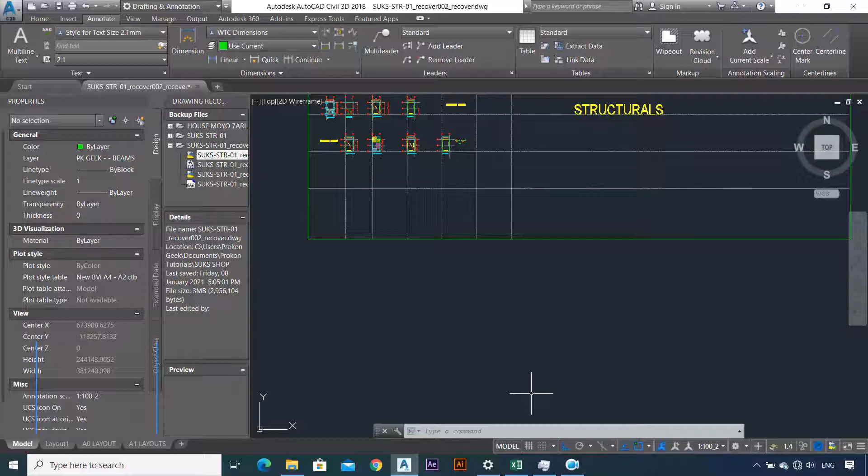Okay, what's up and welcome back to the channel. This is the Prokon Geek, and in today's video we're looking at Let's Design a Double Story Building Together Part 5, where we'll be looking at the takedowns for preliminary sizing of our bases. So without wasting too much time, let's get right into the video.

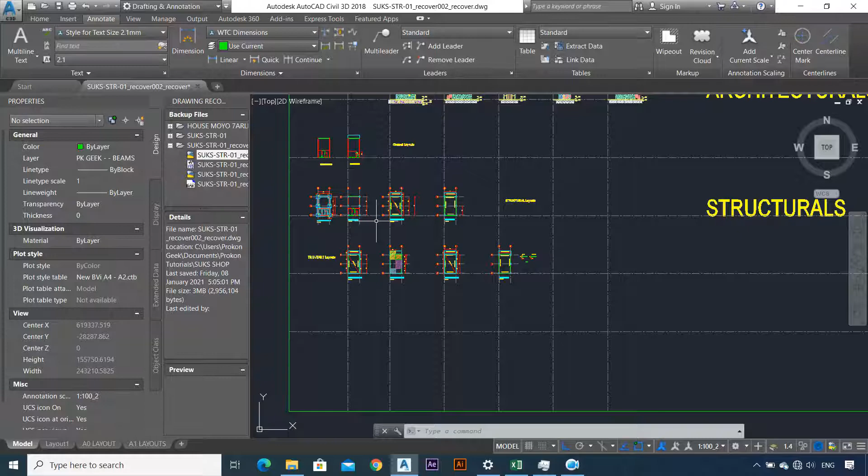So as I told you, we already have done part 1, part 2, part 3, part 4. And if you remember the first thing we did, I always like to repeat this: we took our architecturals, we cleaned the architecturals, we established our structural layouts, and later on we did the tributary layouts. We also managed to establish our grid lines and do the tributary layouts, which is great.

Now what we need to do is, as I told you, the design approach is you get your calculations, you preliminary size the foundation that you would want to use, or you just see the amount of load that will be going down to your foundation, so whether the pad footing you decided to use will be okay, or in case you may need to use raft footing, or you may want to use piles. All that is determined when you do the preliminary sizing.

Now normally when you're designing, the best thing to do is to go from the top going to the bottom, which is what we're going to do now, as opposed to the previous series where we did a bottom to top design, where we did calculations and started designing going up. Right now we're still using the same method of going from the top going down, looking at the loads going to the foundation. This is important for actually determining if the foundation we need to use, or the one we have chosen, is going to be of good use.

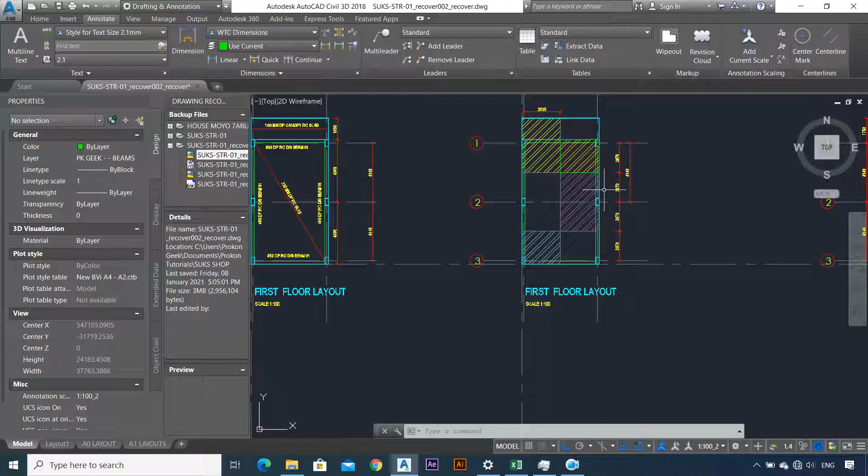Having said that, so there we are. We established our tributary layouts, and as I told you, the first floor is very similar to the ground floor and the roof for this building, but in essence we're just going to be using the loads coming from the roof, right, where you can see my mouse, and then the loads coming in from the first floor. But the loads coming in from the ground floor do not really have an impact on our foundations, that is the pad foundations, because we're doing a frame structure.

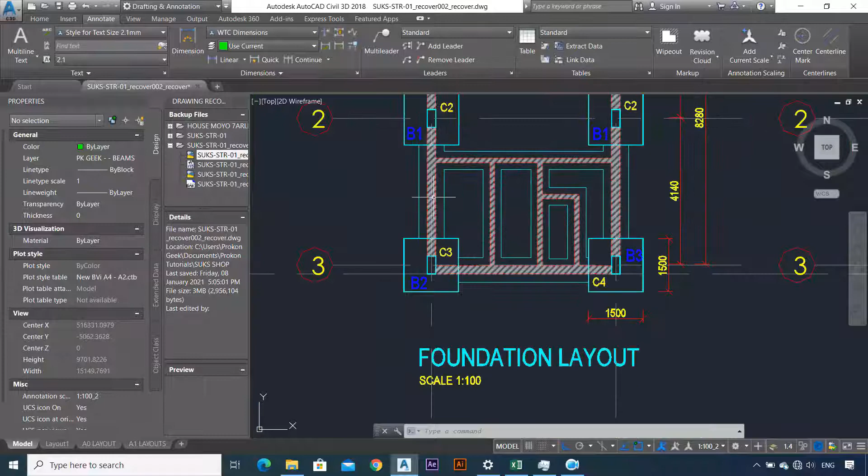As these, that is to say, if we go to the foundation layout, you can see there's going to be a strip footing, so the slab within the building for the ground floor will be bearing directly onto the ground, and the other loads will be transmitted via the walls straight into the strip footing. But what we are mostly concerned about are the loads coming in from our columns and going to our pad footings or pad designs, which is what we want to see today.

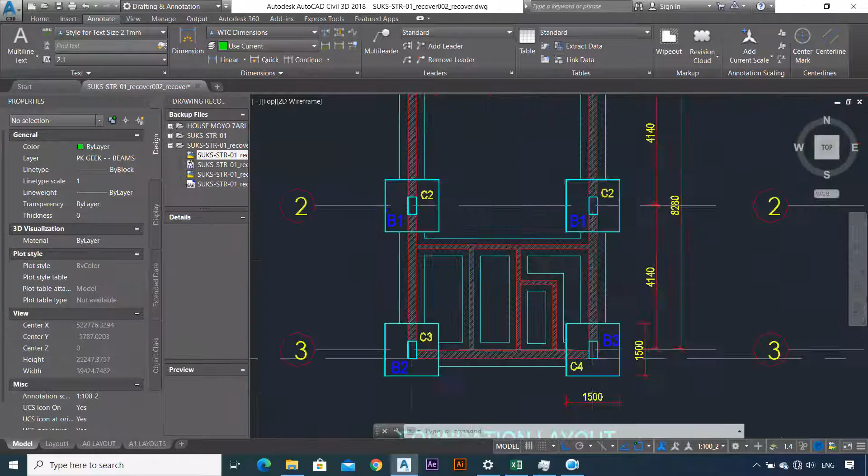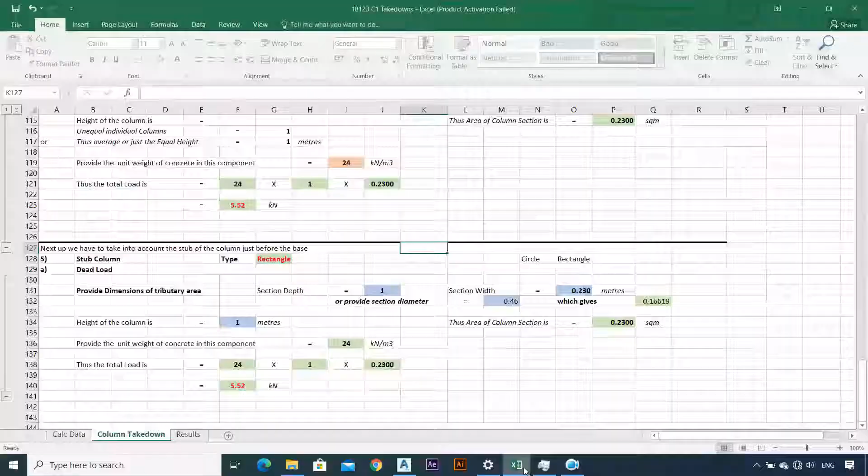So we need to find out if the pad footing will be okay, and also what size we may need for that pad footing. And to do that, we need to do the takedown. So the first thing that we're going to do is a takedown for column C1, which is this one. Then we're going to do for C2, and then we're going to do for C3. So what we're going to do is, as I told you, I already have this sheet.

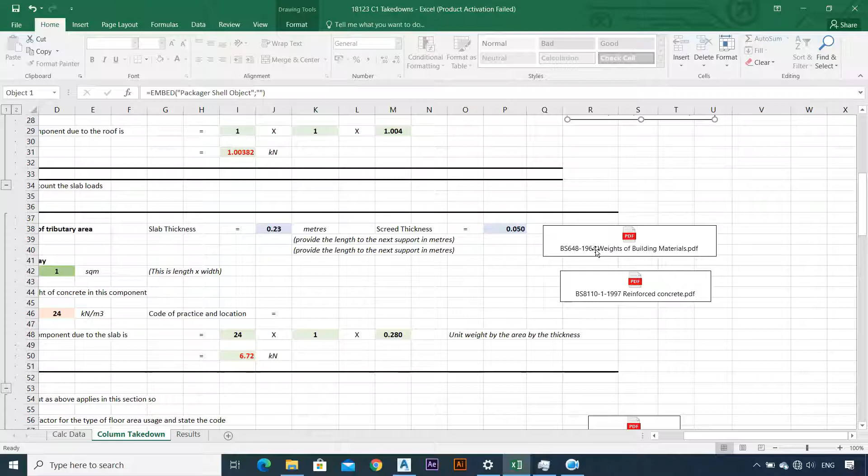What I'm going to do is distribute the Excel, since I created it. Also, for the roof, the minimum loads to be used are already embedded in the Excel, so you don't have to worry about it.

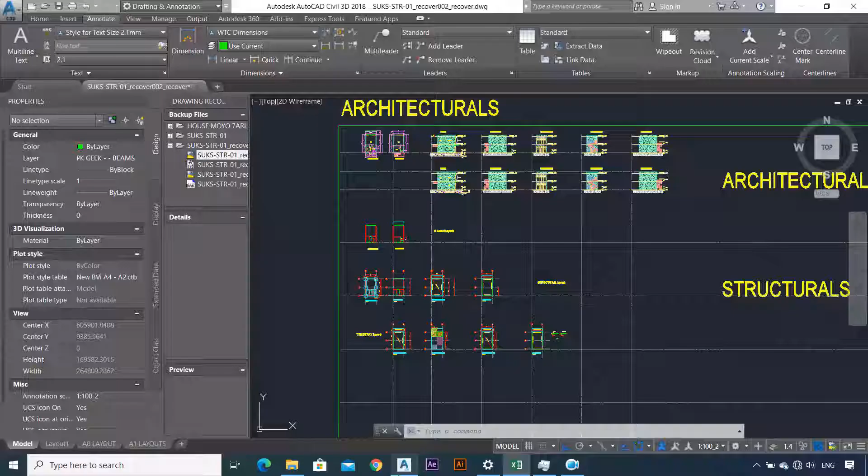Now to get started, we need to calculate the loads that are going down to C1 for this particular building. The first thing we start with is the roof. At the roof, first we have to take into account the roof loads. For the roof, you start with the dead load before going to the live load.

One thing you do is enter the dimensions of the tributary area from AutoCAD, or just enter the area directly. By default it's 1, and we need to change it to the area we have. The roof pitch by default is 5 degrees, because that's the minimum when you have IBR sheets, that is metal sheeting, which is what we're going to have in this case.

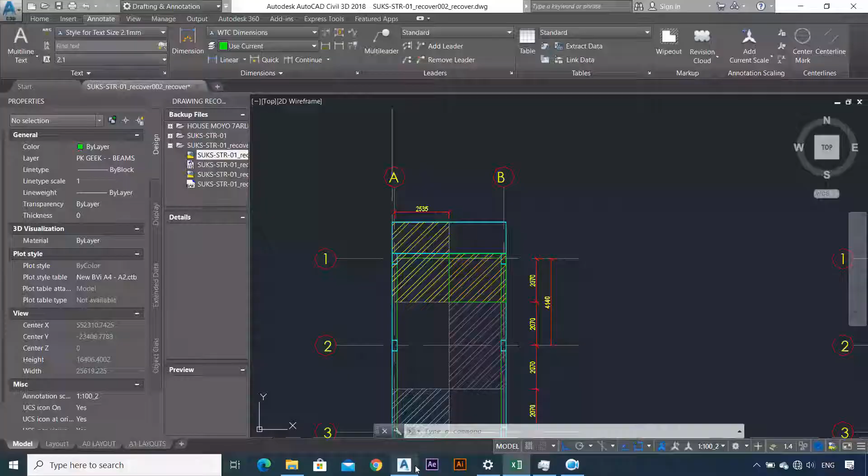Some of you may argue, aren't you supposed to measure the angle from the architect? What you can do is go there and snap to this point, but as you can see, the angle is 1 degree. However, the manufacturer of IB sheets or IBR sheets, where I'm from, which is Zim, requires a minimum of 5 degrees, so that's what we're going to use. In this case, you'd put whatever pitch is on your drawing, but here we're going to use 5.

It's going to automatically calculate the reduction factor for you, so that's one thing that's already covered. You don't have to worry about that.

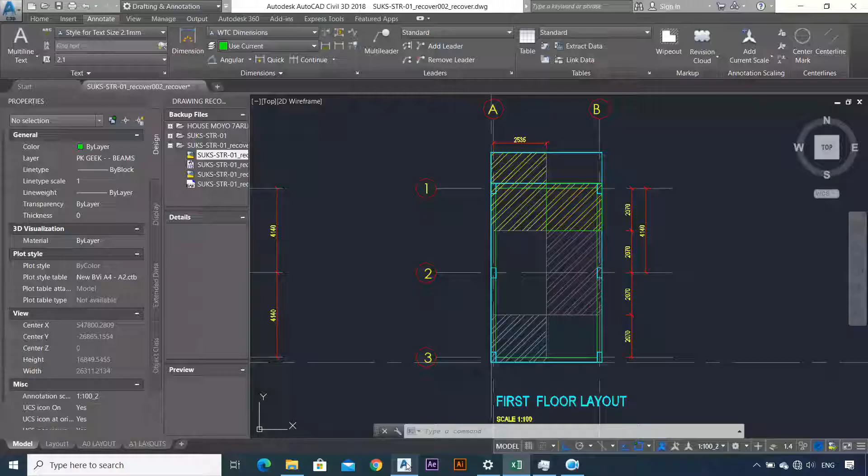The next thing you do after that is enter the area of the tributary. Go back to AutoCAD. One thing to notice is why I have this area and then also this other area - it's because this area includes the canopy at the front, which is the slab at the front. If you go to the architecturals, this is the part of the canopy. But when it comes to the roof, this is not included.

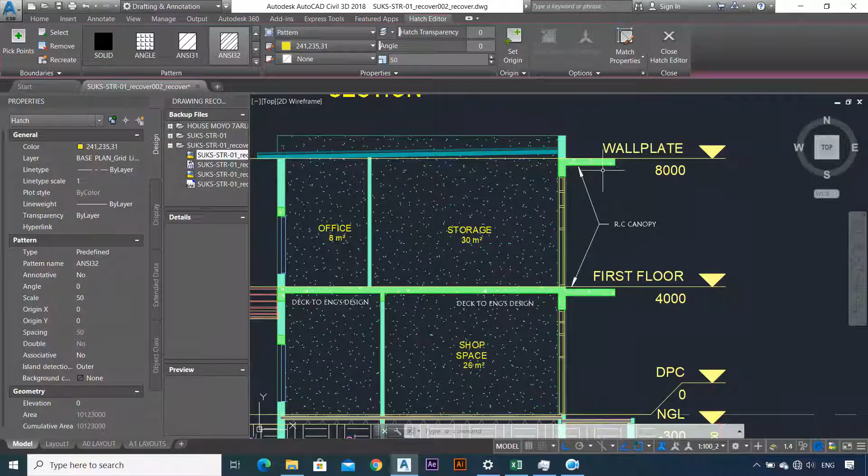This area is not going to be contributing anything because there's no roof at that point, but the roof actually starts from the inner wall. So for your case, you need to come back - that's the reason I decided to have two areas for this portion. This portion represents the area that is directly coming from the roof alone, not part of the canopy slab.

So if you go to that, you'll find the area is 6.148 with some zeros. What you do is divide that by 1,000,000, and when you divide it by 1,000,000, it means 6.15. So go back to this and key in 6.15.

Now that you've keyed in 6.15, what is the factor that you're going to use? Remember, this can be coming from the ASCE 2002, but you will find that this is adopted from the Residential Design Guide 2017, which is also based on ASCE, but from 2017. So you can disregard the original, and you could say ASCE 2017, or the Residential Design Guide 2017.

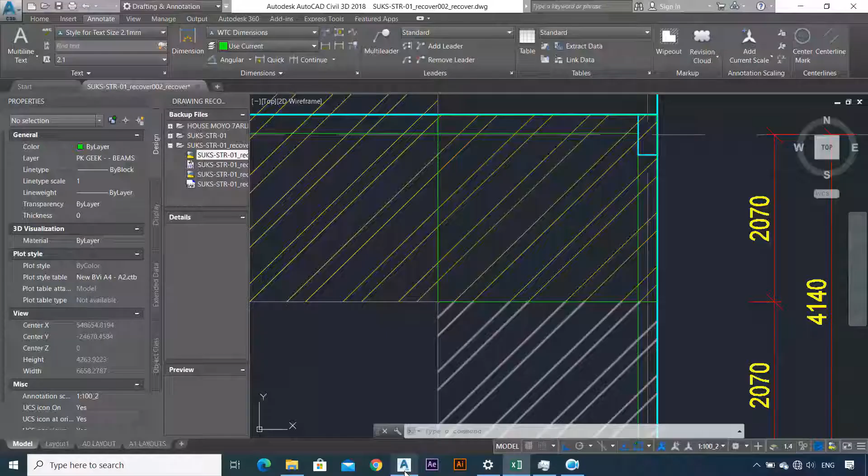Then what are we going to do? So the roof, from the architect, I consulted with them way before when they gave me this drawing, and this roof is supposed to be IBR sheets. We're saying metal roofing, this is galvanized, you could say galvanized steel, whatever it is.

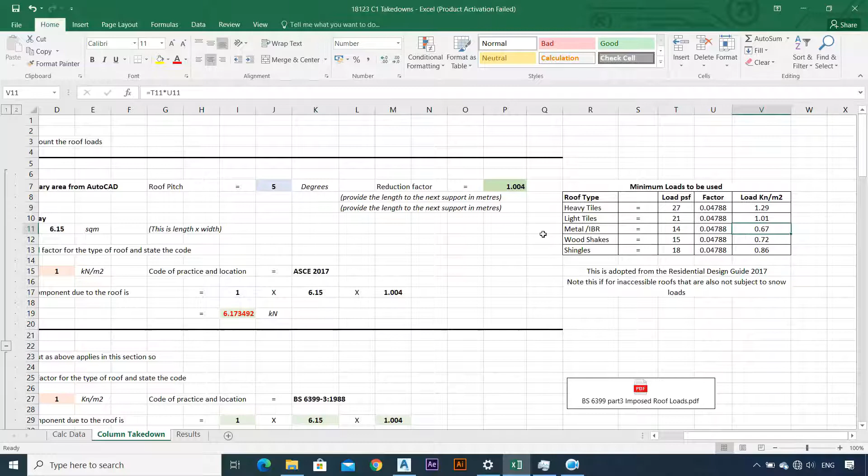So in this case, if it's metal or IBR, the load is 14 pounds per square foot, or 0.67 kilonewtons per square meter. This is the minimum, remember. So I could key in 0.67 right there, or I could key in 0.75 or 0.7, because the minimum is 0.67. It was supposed to justify the minimum. Normally you want to play around with the minimum because that's the average seen in the field, but in this case I decided to play with 1 to cater for any contingencies in the manufacturer, or deviance that could happen whenever they're producing these IBR sheets. Once that is done, we've keyed in 1.

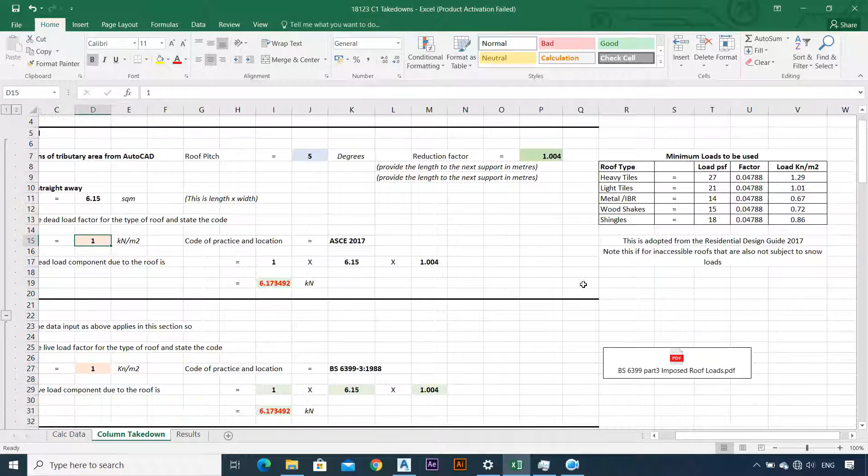The next thing you would want to do is calculate for the live load. So for the live load, you basically provide the live load factor for the type of roof and state the code. In our case, the factor is going to be 1.

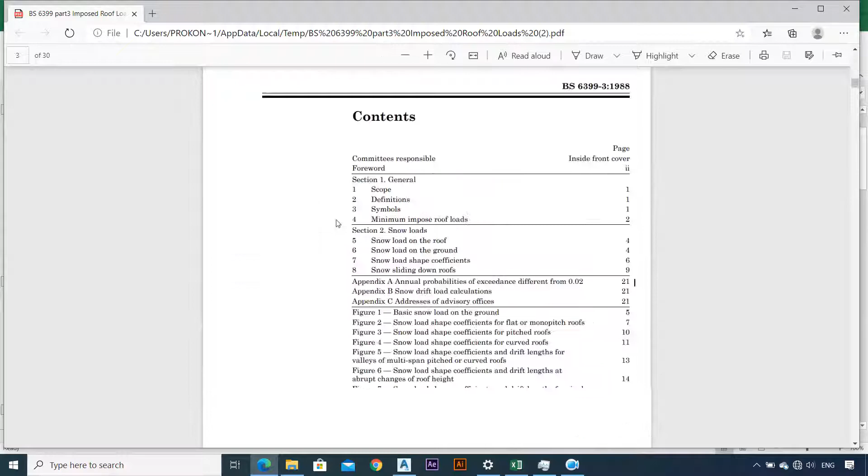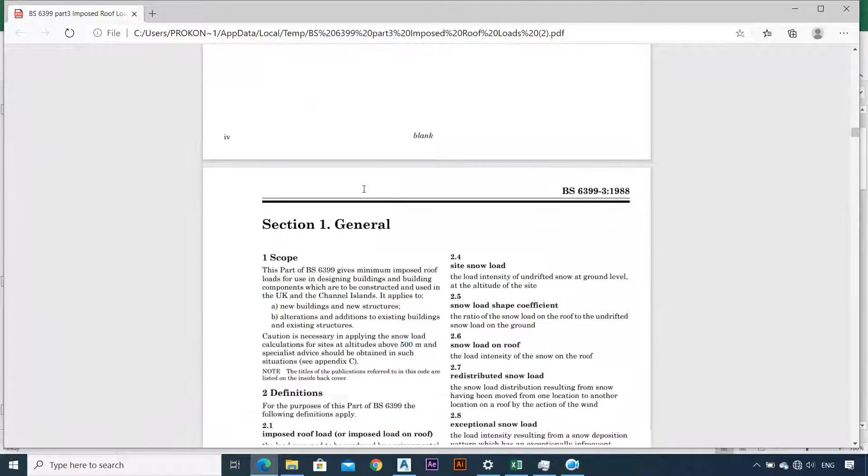You can always open up the code that you're going to use, and this particular one has the imposed roof loads for roof. If you go to section 1, clause 4, it has the minimum imposed roof loads. So let's just go down, this is section 1, and we want clause 4 where you have the minimum imposed roof loads, and in our case we have an inaccessible roof.

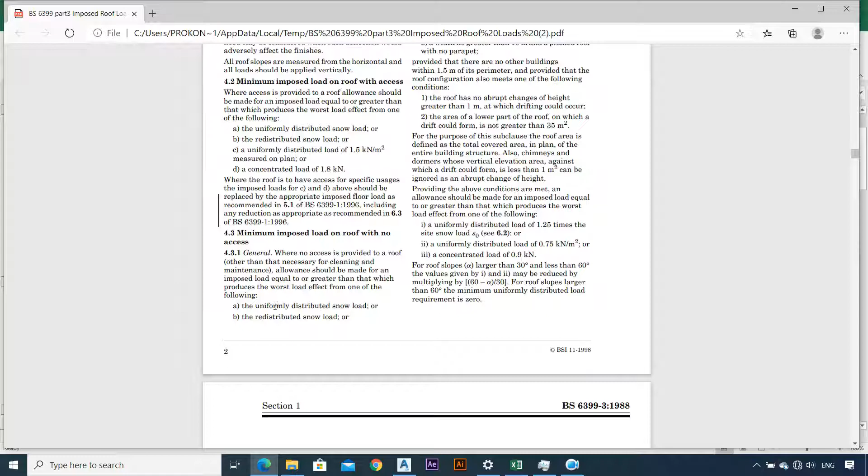So you have the minimum imposed load on a roof with no access, where no access means you only access it for cleaning and maintenance. So you either have uniformly distributed snow load that you have to calculate, or use the redistributed snow load, or use a uniformly distributed load of 0.6 kilonewtons per square meter measured on plan for roof slopes of 30 degrees or less.

Or a uniformly distributed load of 0.6 multiplied by 60 minus the angle, which is above 30, divided by 30, and that gives you the load. Or if the pitch is going to be greater than 60 degrees, you use zero load as stipulated. So as the pitch increases, the load on your roof on plan actually decreases. In essence, the higher the slope on the roof, the less the load.

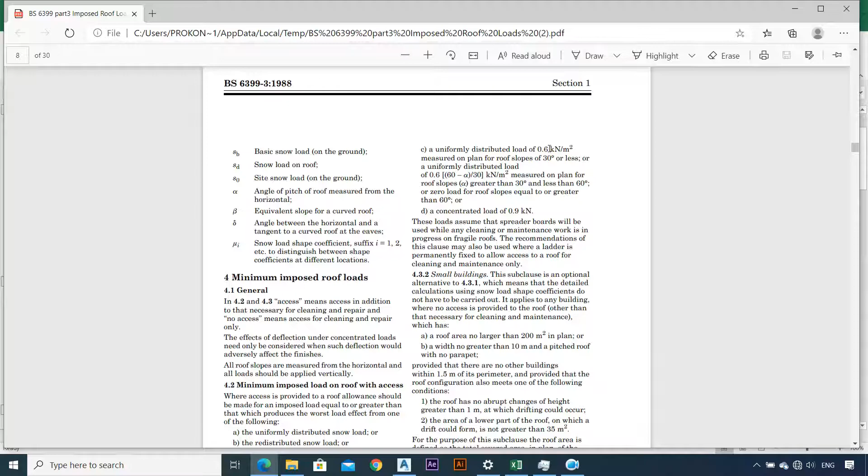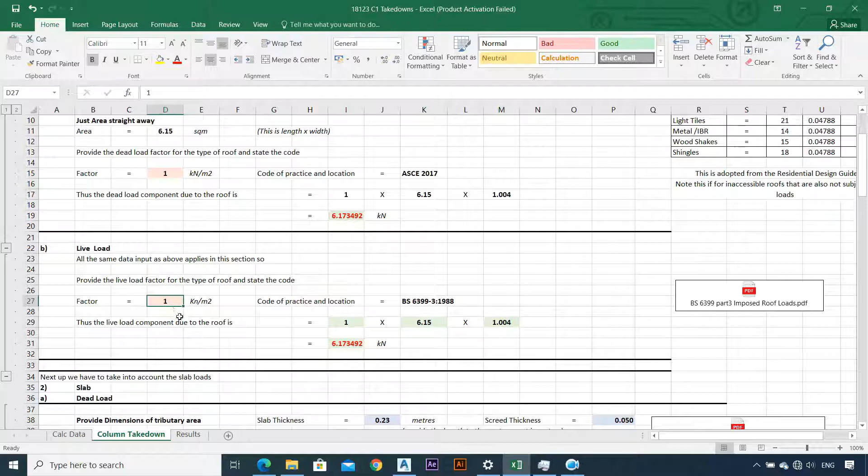But in our case, you're in Zimbabwe, you're in Africa, you're not expecting any snow, so you don't have a need to calculate the snow loads - you just enter 0.6. But in our case, I'm just going to put in 1.

Now once we're done with the roof, the next thing we need to do is go to the slab. So the slab obviously has the dead load and the live load. For the dead load, we have the slab thickness and the screed thickness. Normally people use the load for the floorings and everything, but I just want to approximate everything to screed, and in this case the screed usually uses the standard of 50 millimeters.

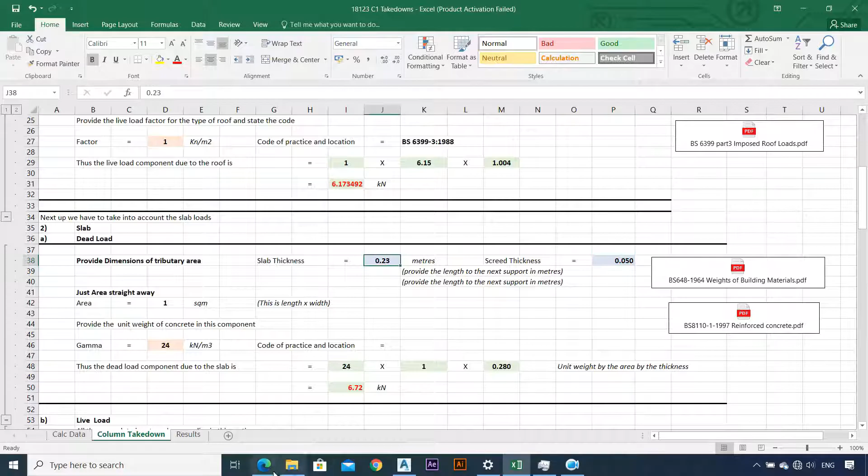Normally it's 30, 40 or 50, but I go 50. And for the slab thickness, remember we sized our slab and we agreed we're going to make it - the size slab we did is somewhere, yeah, this is where we sized everything, 220 and 170.

So the 220 slabs, you're just going to key in 0.220, and the area now is the area for the tributary. So in our case, the canopy thickness is different from the actual first floor thickness. You understand? That is very different.

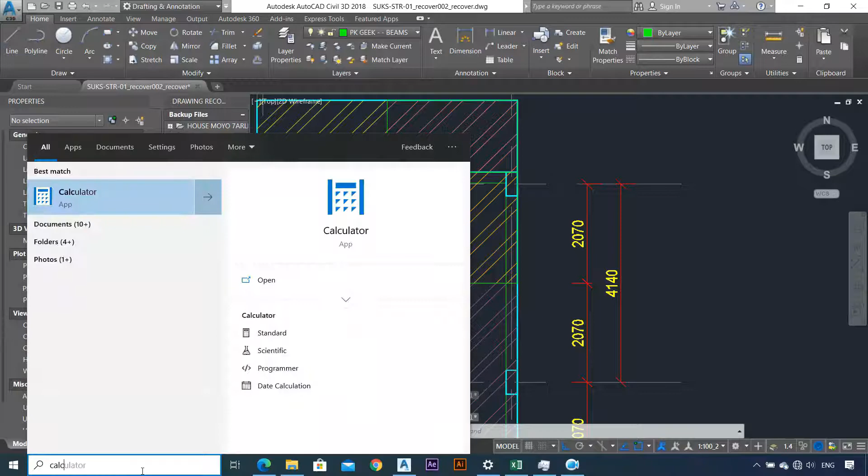Then I'm also going to calculate what percentage this is, 3.97 - we could say 3.98 divided by 6.15. Let me use the calculator: 6.15 divided by 3.98 - that gives us 1.5. So in essence, we have 1.5 slabs.

So what we're going to do is we're going to take this entire area for this one in particular, and then we're just going to use this to calculate our load. So this is what's going to happen. We have 10.1, this is 10.2. So this is what you're going to do for the load - the area you're going to put in is 10.2.

This is preliminary - remember, this is why we're doing this. And if you want to verify the weight of the concrete, just go to the weights of building materials. This is just for the BS. You can know the BS that you need to check. And then also this is the BS for reinforced concrete to see how those things deviate and how you can use them.

So in our case, we're going to say we have a slab thickness of 0.22 and screed thickness of 0.050. But since we said for the slabs, how many slabs? Normally we were going to have 1 because of the first floor only, but in our case we're going to put 1.5 because of what we just calculated.

You saw me do the calculation. This is just for preliminary, but if you have time and you want to input it, the best thing is to calculate the load for the slab for the 0.22 section on its own, and then you do for the 0.170 section on its own with its screed or without screed, depending on what you would want.

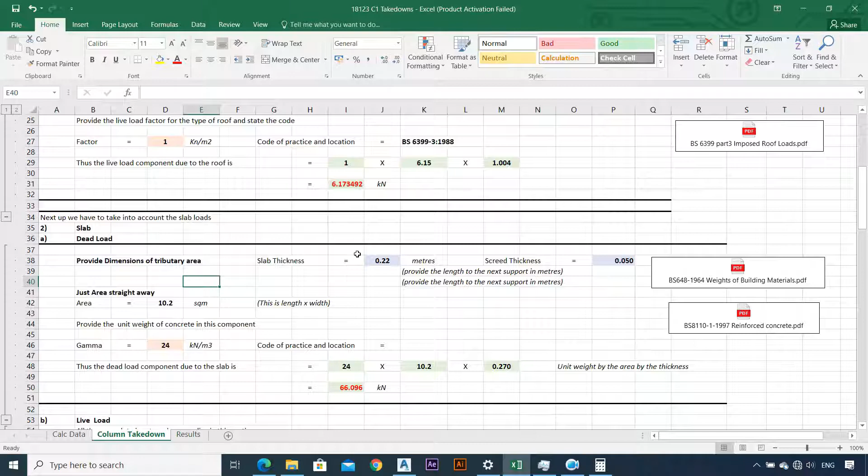But for this particular one, we're just going to calculate for the 0.22 section, and then we're just going to say we have 1.5 slabs. Why? Because we do have the portion of the canopy that's going to be up on the eaves level, which is not available - at the eaves level we don't have the 0.22 thick portion of the slab.

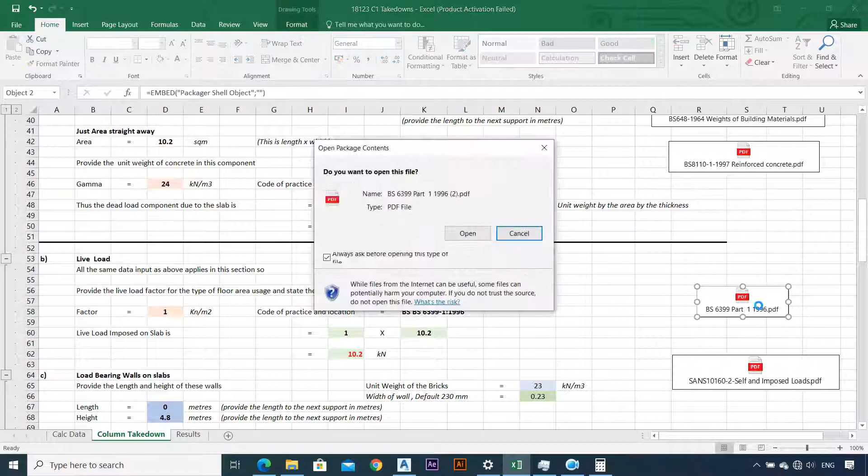Once that's done, the next thing that you need to do is go to the live load, and once you're at the live load, now the most important thing is to choose your factor. So in this case, since we're using BS, particularly the load, remember what you need to do is also go back to the architecturals and identify what the area is going to be used for.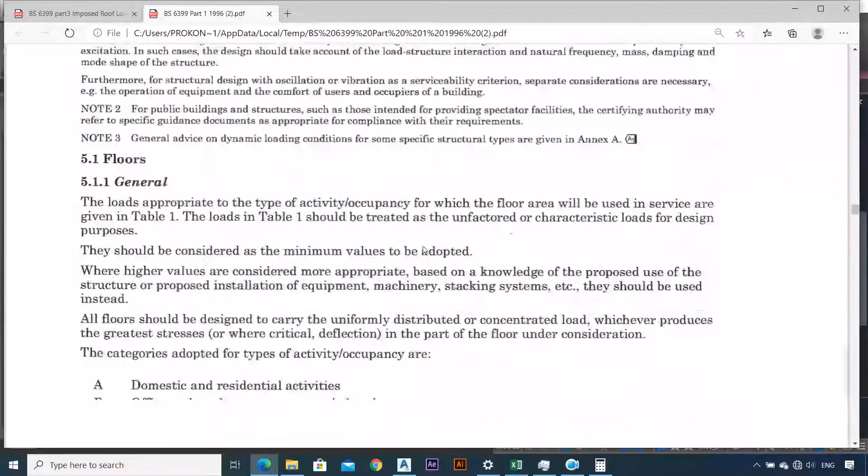So in this particular case, we have office and we have storage. So in particular, we're going to have storage for office spaces. So where you go, let's just check - this is where you have the loads for your building spaces. So you're not going to use residential because that is section A. What you need to do is start looking at section B and C. Why? Because B is offices and work areas, right? And then once you're going to do is you have this.

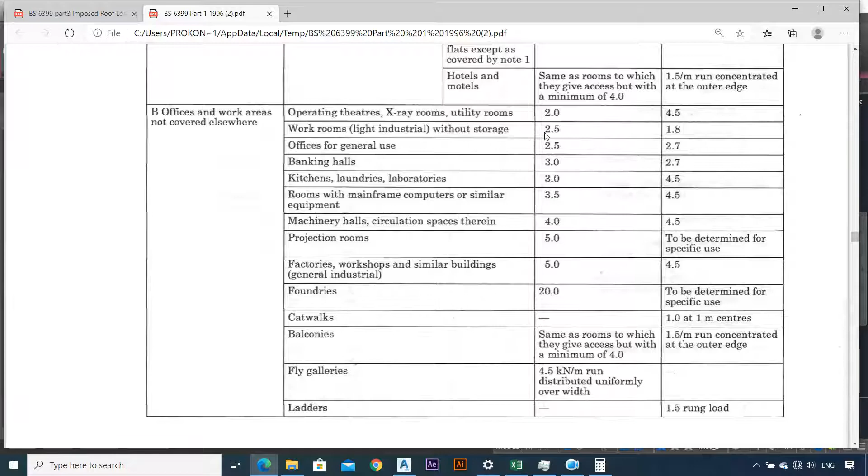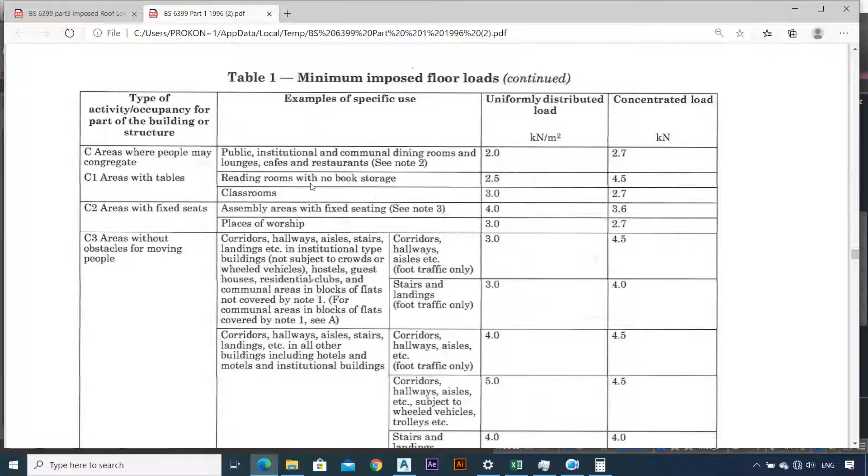These are the loads that you can use. Remember, this is workrooms, light industrial without storage, so without storage you're going to use 2.5. But now because we need storage, we need to look at a place where we have storage. So in cases where we have storage, we now need to start looking at reading rooms with no book storage, that's 2.5. So that's not what we're going to use.

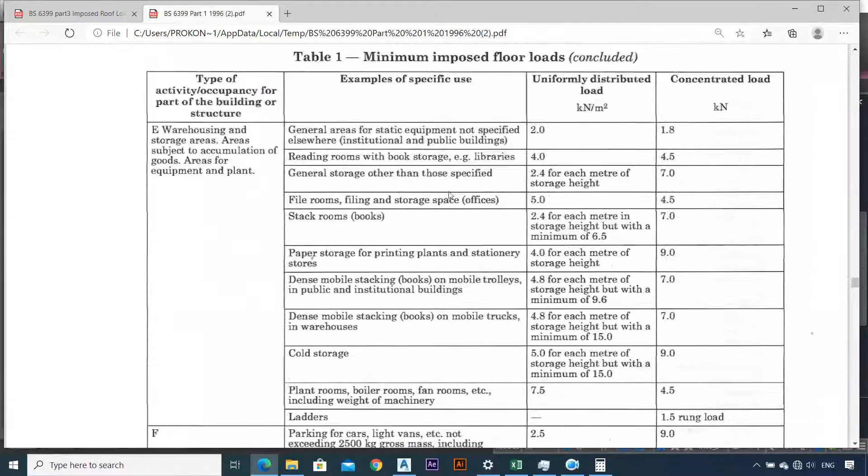From my experience, what we need to find is somewhere there is storage of materials, so that usually comes to section E. The general storage of anything else that is not specified is 2.4 for each meter of storage height.

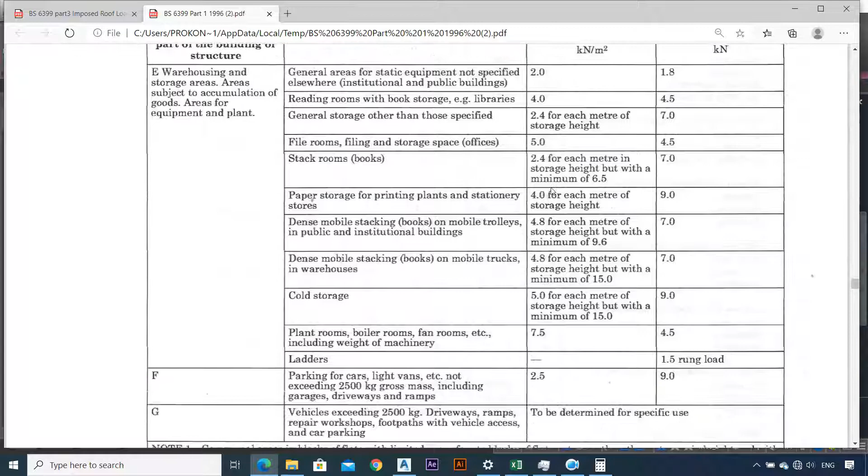But generally, if you're going to have cold storage or anything, the minimum that you usually use is 5. This is where you have file rooms, filing and storage space for offices is a 5. So you definitely, and if you want, we can always check with SANS as well, since SANS is more specific than BS.

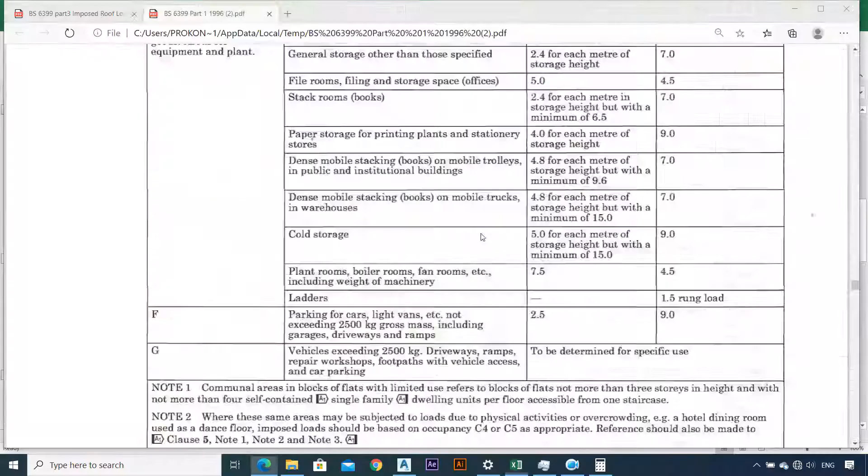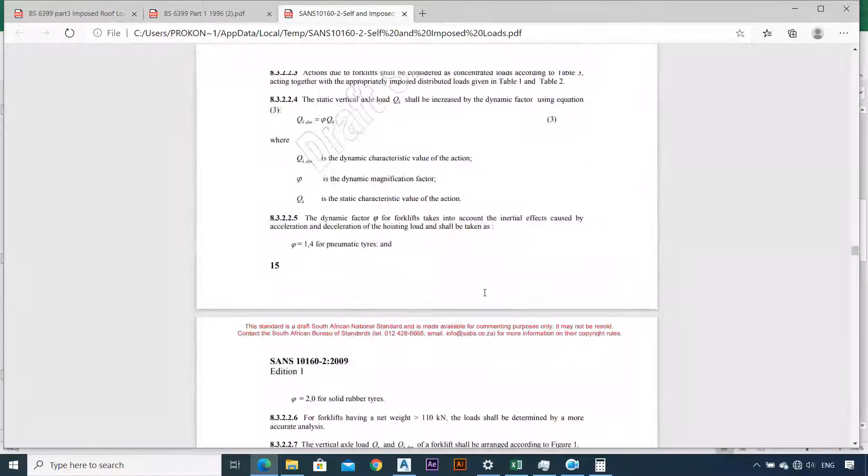If you go to SANS, what it then says, if you go down, let me just page down. We need to look for the section, I think it's section... this is section D. Nope, this is... yeah, there we go.

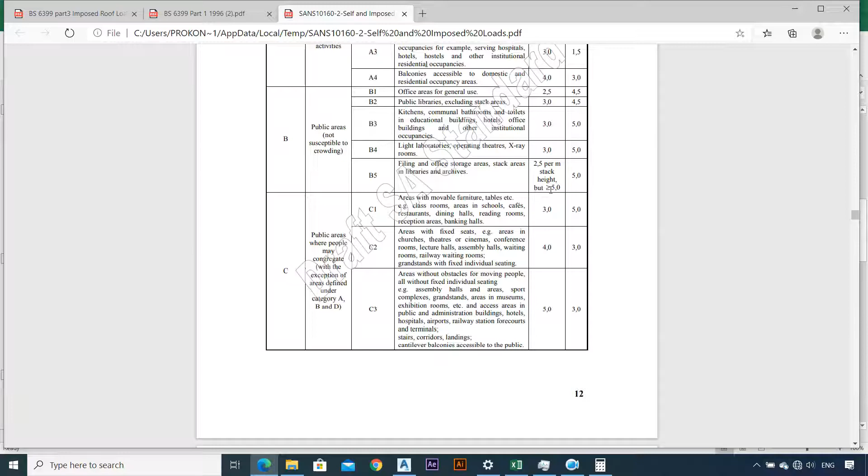Filing and office storage areas, stack areas in libraries and archives, or anyway, 2.5 per meter of stack height, but it always has to be greater than or equal to 5.0. So that is where you need to institute your load. This is the load that you're going to use.

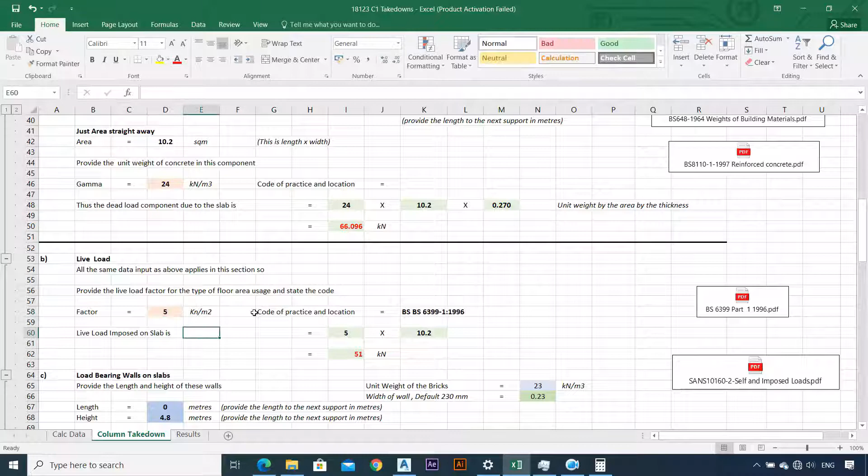So in essence, what we're going to do is go back to Excel, and once we're back in Excel, you're going to have to put in 5. And one thing you would want to know if you're doing it correctly, your dead load usually is bigger than your live load, so that's one thing that you need to just look at when you're designing your buildings.

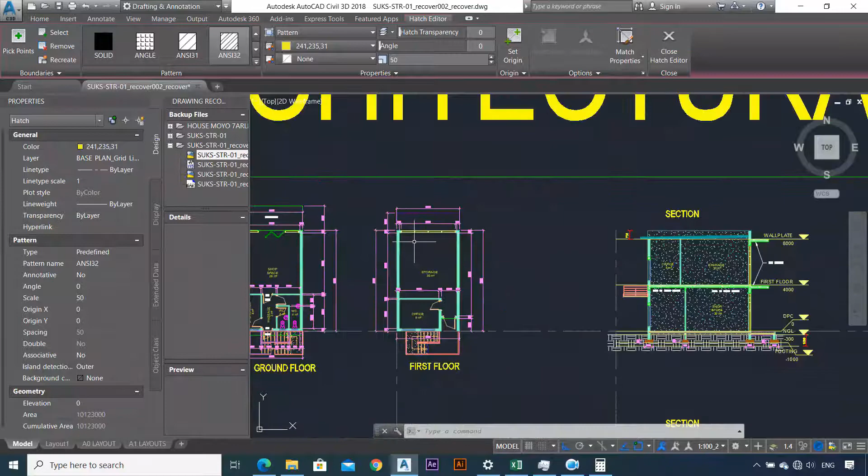Now this is done. The next thing we need to look at is load bearing walls on slabs. Fortunately for us, if you go back to AutoCAD, we don't have any load bearing walls on our slabs at either the first floor or even at the eaves level. So we're good to go.

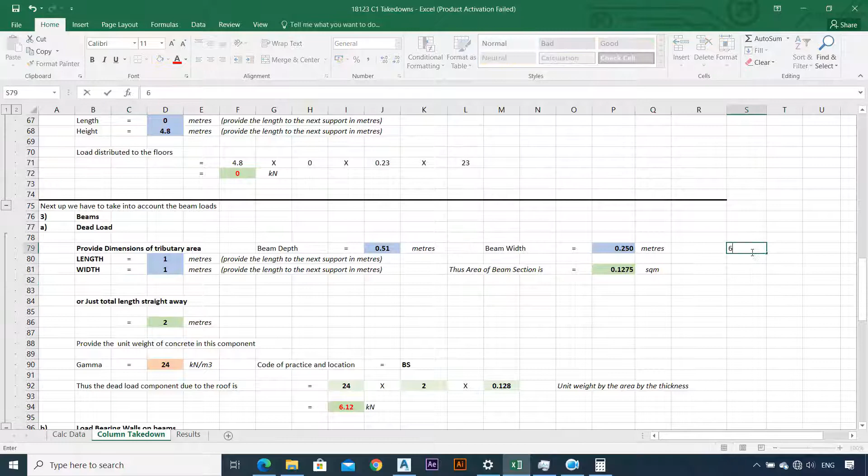Now we go back. The next thing we need to look at are the beams. In our case, we have different beams of different lengths. So we have a 600, then we also have a 600. When it comes to the eaves, we have 600 and 300. Then we have 600 and 450 if you look at it correctly.

What I'm trying to show you is, if you look, we have 600 and 450, and then we have 600 and 300. So you go back to Excel. What you're going to do is, let me put 600 there. Then what you do is you add this up. We're just going to add this up because it's a preliminary design.

Then we're just going to say this is equal to this divided by the count, so we count from everything there. Yes, that's what I want to do. So you get 487.5. Are you sure that is correct? What I'm going to do is let me just do this the old manual way. It is still 4, definitely. So this is the beam depth that we're going to use, which is 487.

So that's 487.5. Now for the width, remember we have 300 and 230 wide beams. So in this case, it's going to be equal to 230 plus 300. Then if you proceed, you're going to have to divide that by 2. All right, so this is the type of beam that we're going to use. Oh, remember, it's supposed to be 0.487, not that. That is correct.

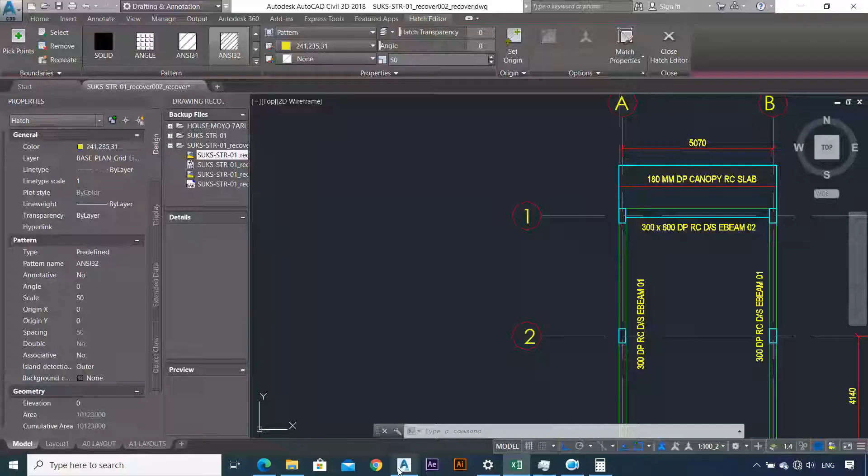So in this case, let me see what the tributary areas are. We have 2535 and 2070 because we're looking at one column at the moment. So that's 2.535 and 2.070. If you go back to AutoCAD, that is looking nice.

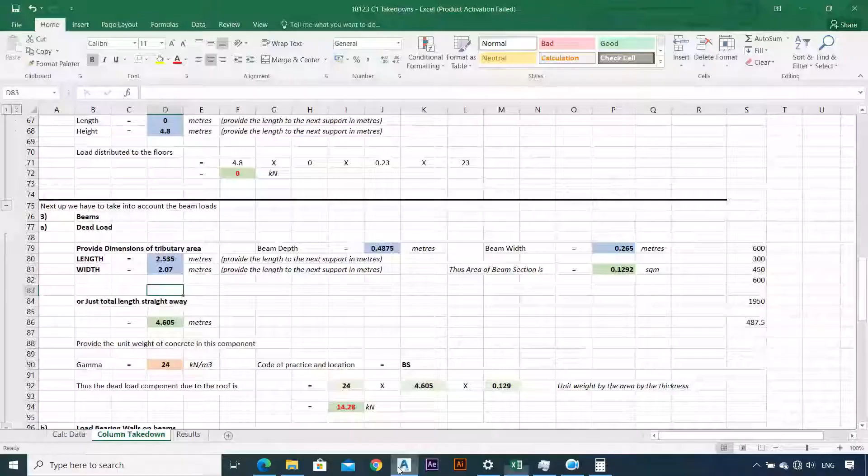And then you have the total length, and automatically it calculates the load for you. Then you're going to go to where it says beams, and in this case you have 2 beams, which is okay, because we're averaging everything out.

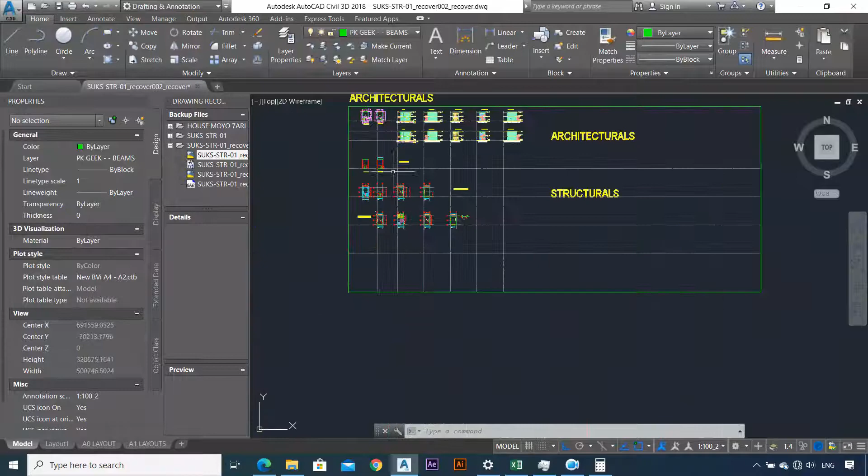Now after you do that, you need to load bearing walls on beams. For this particular one, remember you do have walls on the eaves, and then walls on the first floor as well. At the first floor, on the front, you're going to have glass, but we're just going to approximate it as a wall for now.

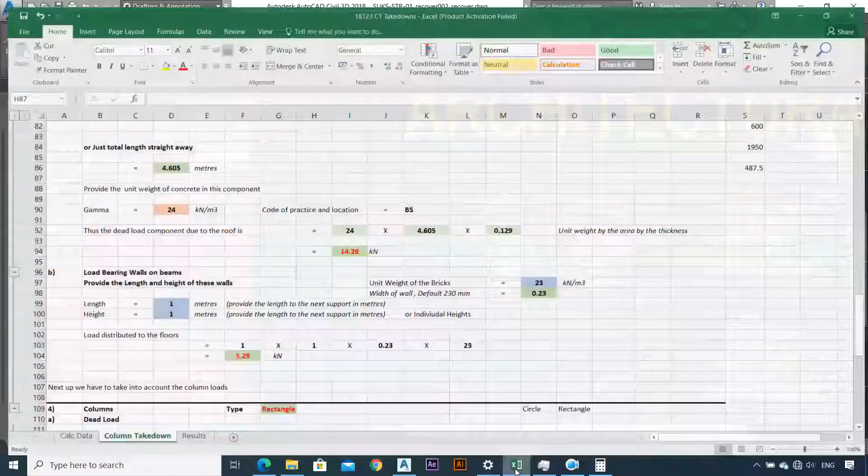So what you do is measure the height of the wall. In this case, it's going to be 4.725. Why am I saying this? Because remember, in one of the videos, we measured the height of the eaves walls, the parapet walls, which is 725, and the height of the walls on the first floor is 4 meters.

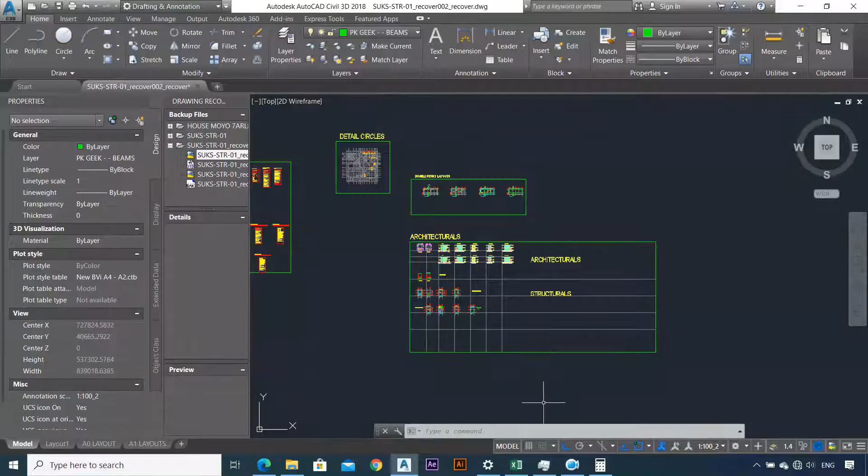So we're going to use 4.725. Now the next thing you need is the length of the walls, but since they're sitting on these beams, it's going to be equal to the length from the beams, which in this case was calculated to 4.605. That's okay, and this is the total load that you get.

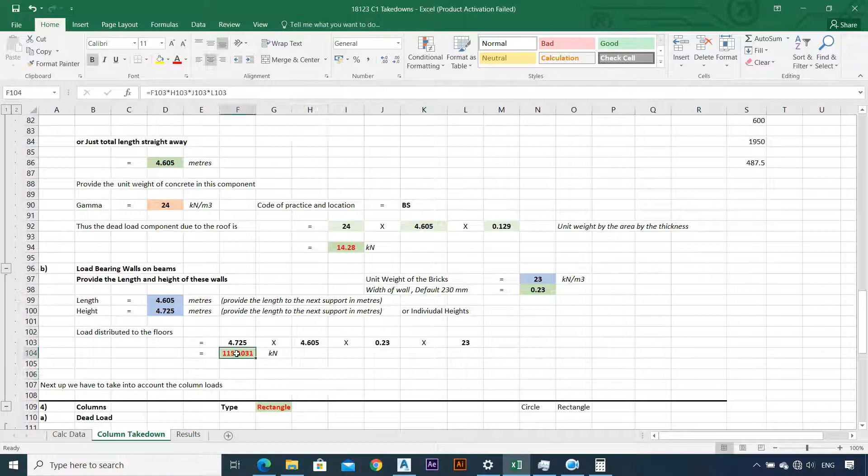Now once that's done, next you need to look for your column. So what is the section depth? For columns, remember we use a column of 500 by 230, so it's 0.5 by 0.23, which is okay. Now what is the height of the individual column?

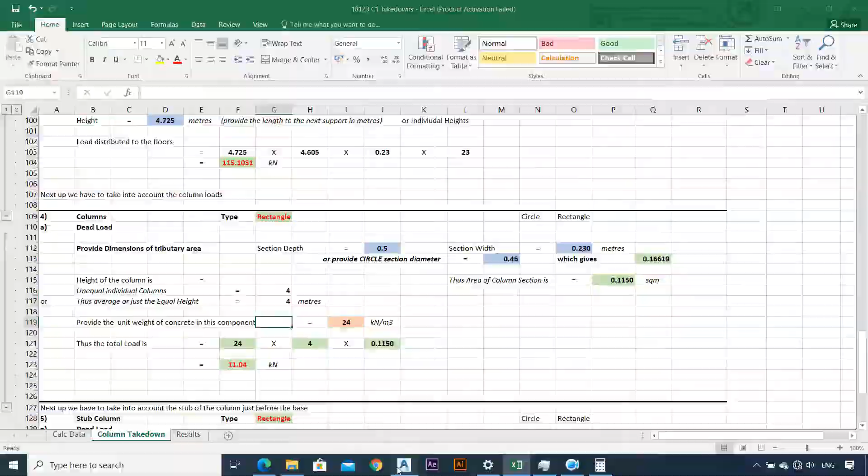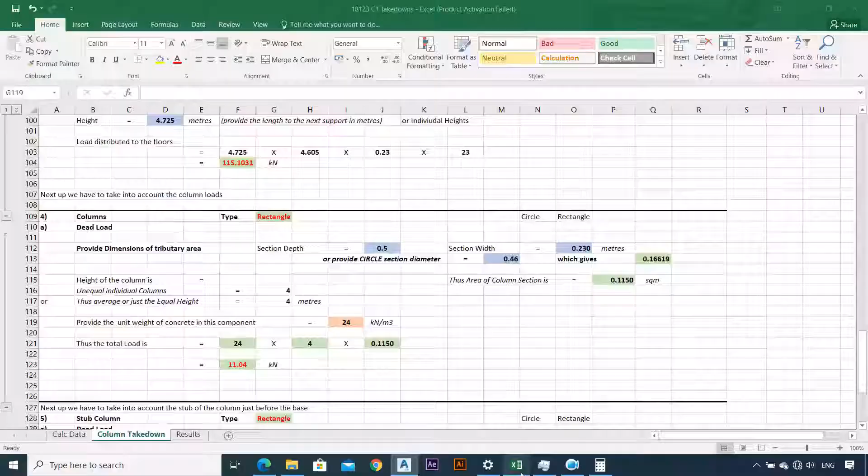It's 4. Why? Because if you check AutoCAD, our column spans from the wall plate to the first floor, and from the first floor down to the bottom. So we're just going to use 4. Even if some of the 4 meters will be supported, we're just using 4 for now. So that looks fine for me. And remember, we have 2 parts of our column, so we are good to go.

So we have one roof, 1.5 slabs. Then we can just say 1, but we don't have any walls on slabs. Beams, we have 2. Walls on beams, we have 1 because we already used 4.725 instead of just 4. And for the columns, we have 2.

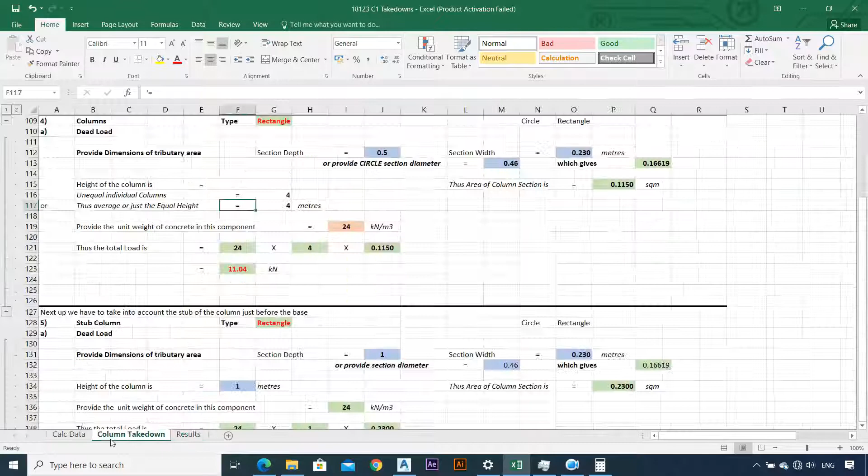Now the last part we need is for the slab, the stub column. In this case, the section depth is still the same. But for the height of the column, what needs to happen is the base. This is the recommendation from the Geo Survey, and the guy who designed this before told me the top of the base has to be 1000 from the natural ground, but the natural ground level is 300 from the DPC level, that is the substructure. So anything beneath the substructure is the stub of your column all the way to the base. That's why we call it the stub column.

So in this case, the stub column is going to be 1000 plus the 300 from the natural ground level to the DPC, because beyond the DPC that's the superstructure, and beneath the DPC that's the substructure. Once that's done, you're going to key in 1.3, that's 1.3 meters. And once that's done, you have 3.59.

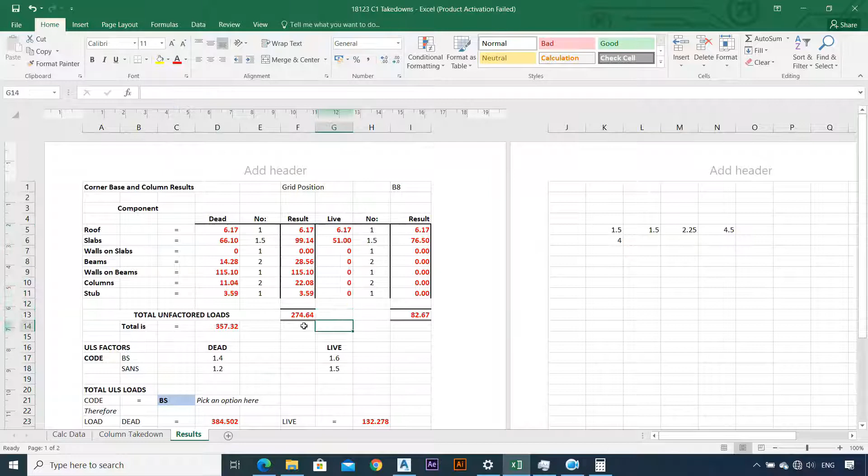The next thing you'll do is go to your results, and your results will be keyed in automatically, where you have the dead loads, and the live loads in that column, and the total unfactored loads, and then you have 82.67, and the total unfactored load. And if you want to calculate the ultimate limit, you can always use BS or SANS, whatever you want. Then BS, you're good to go.

Once that's done, next you'll see the sizing of the columns. No, for the pad footing, you're going to be using the serviceability limit, so that is the unfactored loads.

For any soil that is not expansive, the minimum pressure you can use for most soils is 200. That's the minimum pressure they can allow. Normally you might find values like 150, but from the geotechnical side, 200 seemed to be the proper result. So we're going to use 200 kPa, kilonewtons per square meter.

That's what you use - this is the allowable bearing pressure. What it then does is automatically calculate for you: the load, which is the total unfactored load, divided by 200, gives you the area. Then, assuming a square base, you're going to need either 1.34 by 1.34, so in this case 1.4 by 1.4 or 1.35 by 1.35 would work.

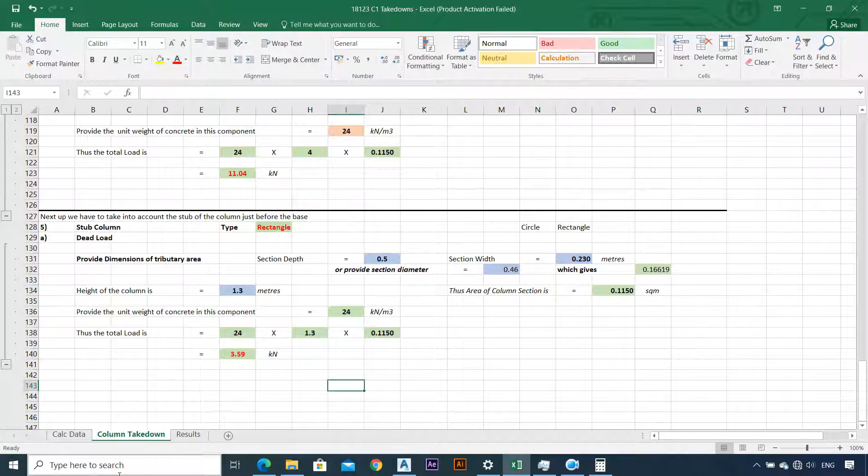So this is basically the process you'll go through as you're designing and calculating the preliminary size and your loads. In this case, a base will work because this is not too large. But if we needed a base that's 2 meters or so, that means you definitely need to change from a base to piles, or change to a raft footing, because 2 meters is already too much - you'd be using a lot of material, so you need to be innovative.

Piles might be more cost effective and much better for your building. But in this case, 1.4 is still okay, so we're definitely going to stick to pad footings.

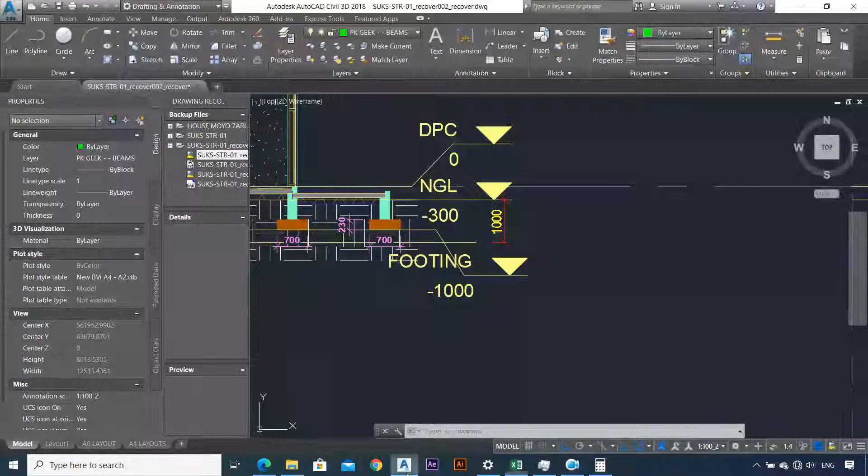So what we're going to do in the next video, part 6, is a quick rundown - I think we still have 2 or 3 types of columns: C2, C3, and C4. We're just going to do a quick rundown now that you know most of the nitty-gritties of this.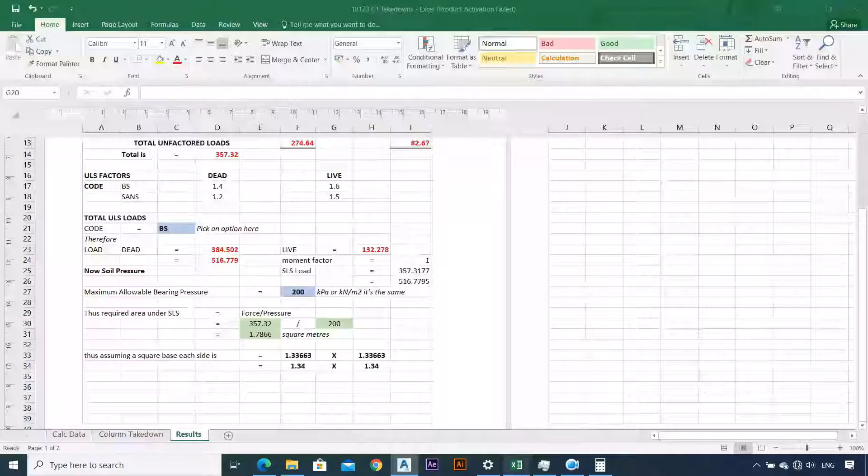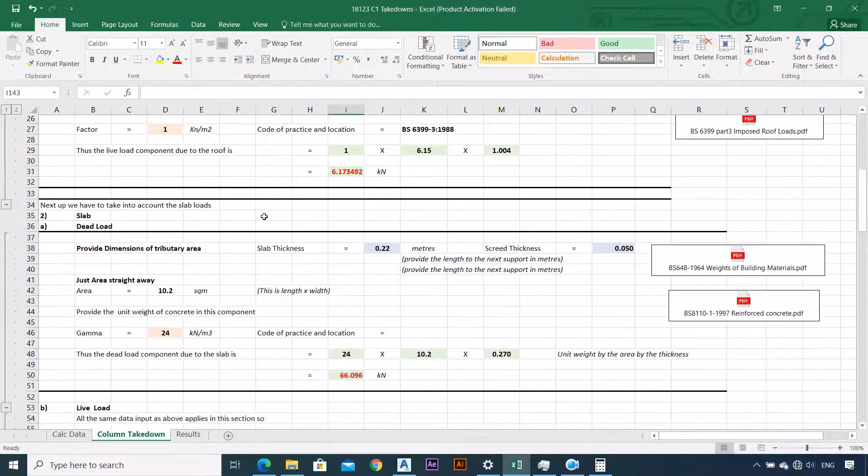Remember, as I was telling you, I was giving you the more appropriate approach given your circumstances. The selection of load factors, live load factors, and whether you want to average your slabs or beams is solely dependent on you as the designer. If you want to be more conservative, do what I did and average. But if you want to be more accurate and precise, do everything for each section on its own.

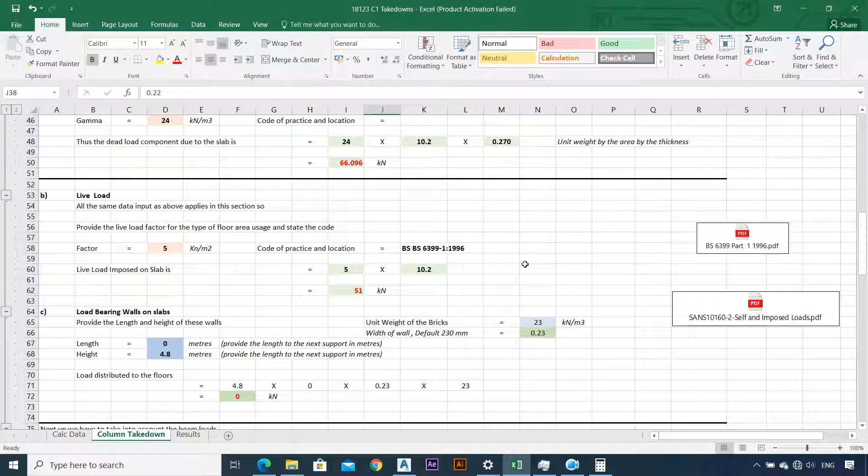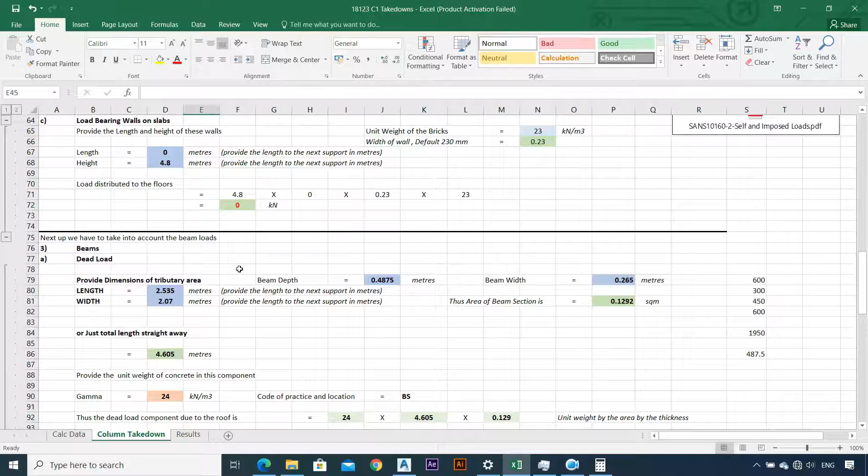What you would do is calculate for the canopy slab on its own, then for your actual slab on its own, then for the beams you do it for every single beam, and calculate the load redistributed to your column on its own. In our case, I decided to average out because we're doing a quick tutorial that we want finished in 30 minutes.

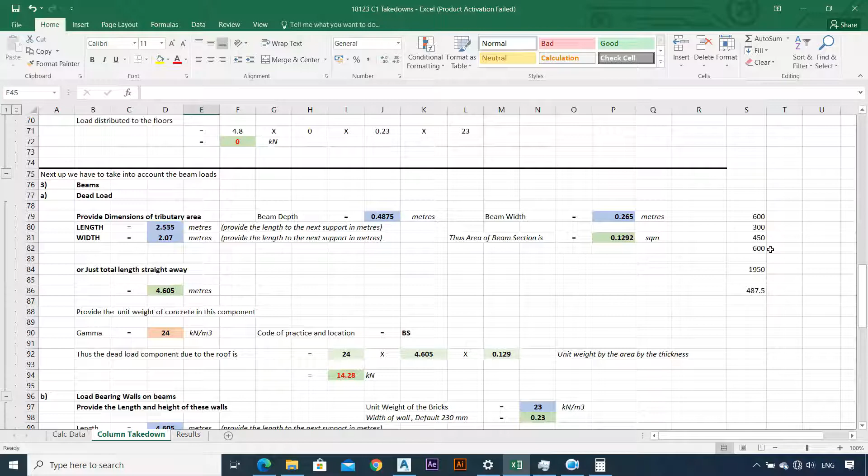But one thing I need to tell you: when we now do the design from the top going to the bottom, that needs us to be more accurate. So we'll be spending our time there and won't be talking a lot - we'll actually do it straight to the point. I might try to do the mathematics, meaning the data calculations, beforehand and key it straight into the Excel before the tutorial, so next time we just flow through it.

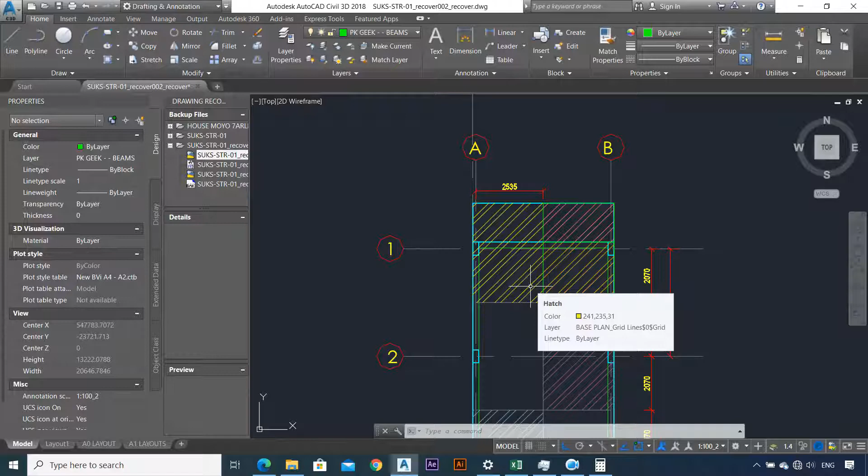So in part 6, if we're done with this, we need to do a walkthrough to summarize everything we've done from part 1 to part 6, because remember, my Prokon is still in demo - they have not yet renewed the license. So whilst we wait for the license, we do a walkthrough and see what else we can do when it comes to Prokon, structural work, and anything else you need on this channel, even detailing.